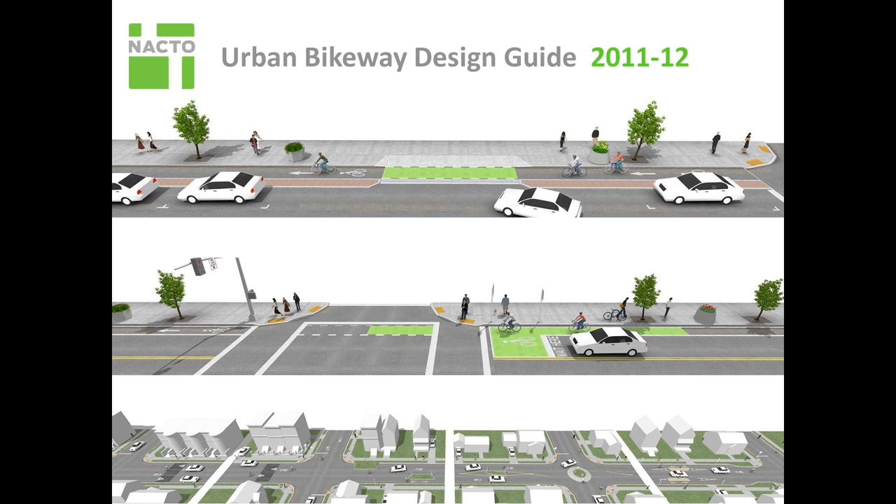Beginning with its Cities for Cycling project in 2009, NACTO really began its first foray into national design standards. The 2011 edition of the Bike Guide circumvented the stagnancy of other national guides, specifically the AASHTO Guide for the Development of Bicycle Facilities, which was extremely out of date and conservative, and had even restricted the majority of engineers from using world-class bicycle facilities like Copenhagen-style protected bike lanes or cycle tracks out of fear of liability and safety concerns

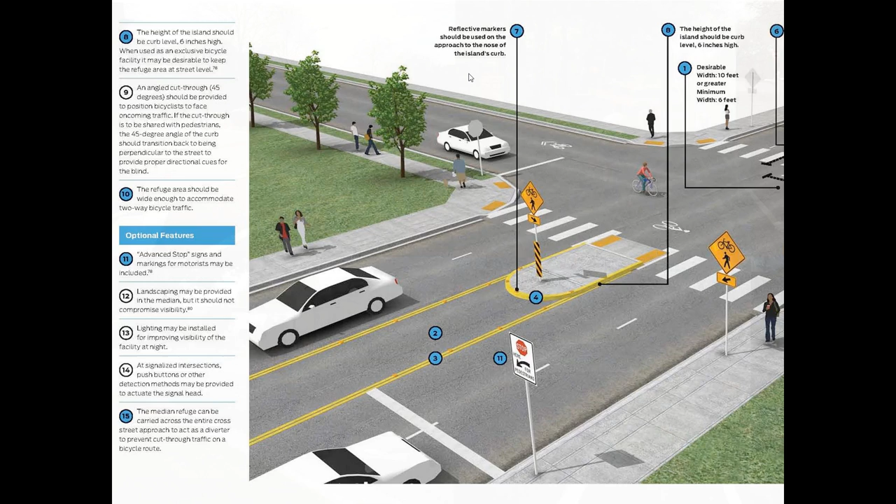but would gladly call a paved shoulder an appropriate bicycle facility. The Urban Bikeway Design Guide translated real-world game-changing projects like Market Street in San Francisco into a set of standard treatments that could be applied in cities across the country. In addition, the guide was one of the first to use a kind of dynamic and highly visual layout, and it has been highly accessible not only to engineers but to city leaders, to advocates, and to citizens who may not have seen these kinds of world-class designs on the street in other countries.

The Bike Guide very quickly set off a string of ambitious projects all around the country. Here we see Atlanta, Austin, Salt Lake City, Charlotte, all projects completed under 1 year after the Bike Guide came out, and it has really given cities a kind of permission slip to innovate. In October 2011, former U.S. DOT Secretary LaHood endorsed the guide and really signaled the way forward for transportation officials around the nation to embrace and implement it.

A significant number of cities have adopted or endorsed it since then and leading up to that endorsement. And in August 2013, we were thrilled to see the FHWA issue a memorandum officially endorsing the guide and distribute copies to each of their division offices around the country.

However, the bike guide was really just one aspect of a much larger set of issues concerning U.S. cities and their streets. The tools, the performance measures, and the day-to-day practices of most city street departments and transportation departments, from traffic signals to transit, really remained rooted in an interstate era approach to highway design, which was predicated on making streets wider, more forgiving to rush hour traffic, and consequently much less bike and pedestrian friendly.

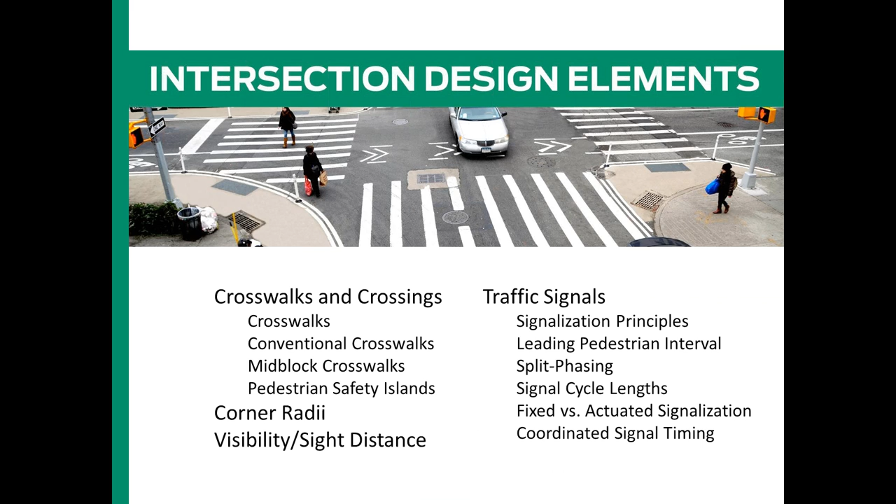Like the bike guide, the street design guide utilizes a really rich and dynamic visual layout, which not only gives cities the tools they need to design great streets, but presents the ideas and the vision, which is highly communicable to others who they're trying to get on board with these ideas.

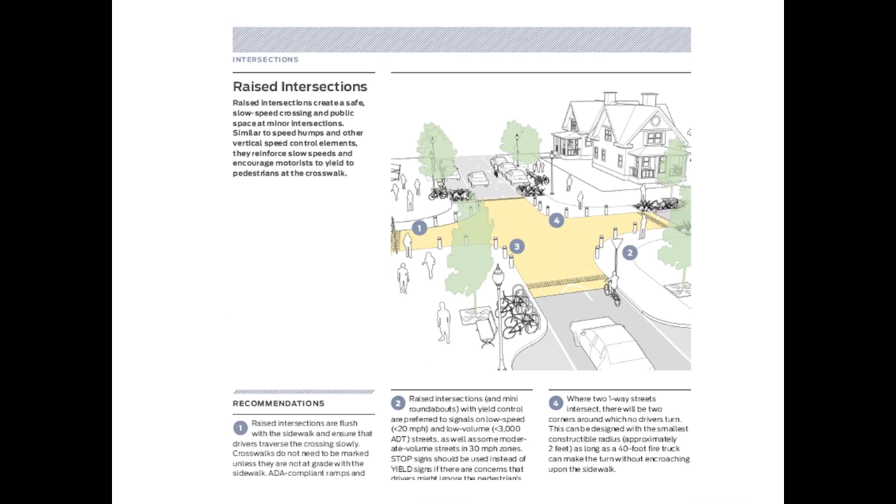The guide takes a significant number of lessons that are being pioneered in NACTO cities all around the country and makes what we call this secret sauce available to cities all around the nation so they don't have to reinvent the wheel.

In addition to the print guide, to keep it a really living document, we built an interactive website which is easy to use, with additional case studies, photographs, and materials that will be updated on an ongoing basis to reflect the state of the practice.

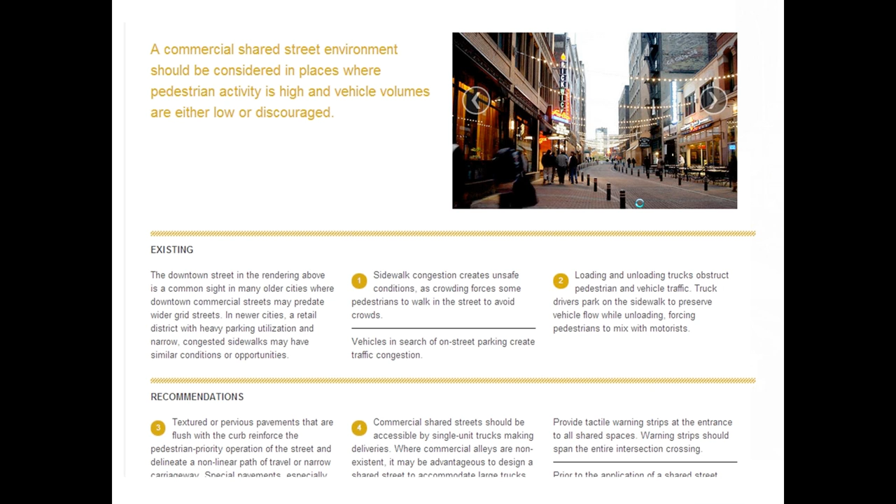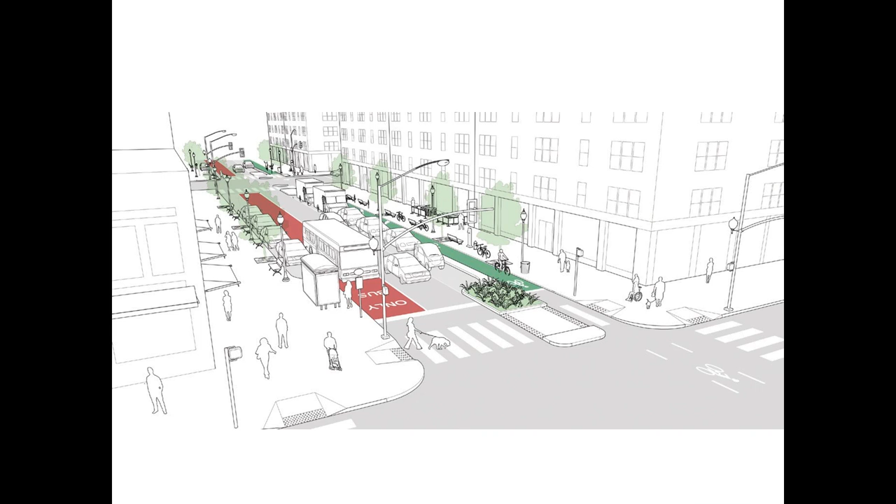Just like the bike guide translated exemplary protected bike lane projects happening in a variety of cities around the country, the street design guide takes projects that embody its main principles and translates these into guidance for cities around the country. The guide also engages some new concepts, including shared streets, creating new standards around those, and taking the best work from cities around the country and transforming it into world-class street design standards.

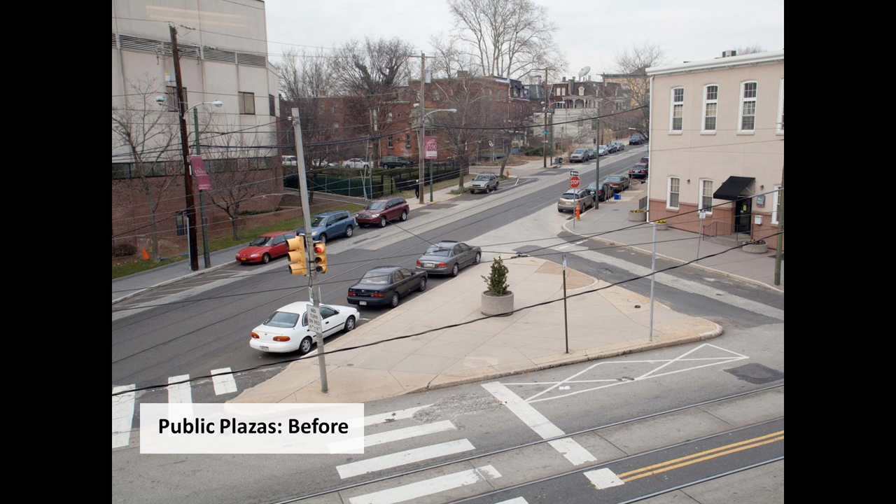At the center of the guide is a focus on how cities can begin to use tactical and low-cost solutions on city streets, like this new public plaza in Philadelphia, and then provide easily adaptable guidance for cities all around the country.

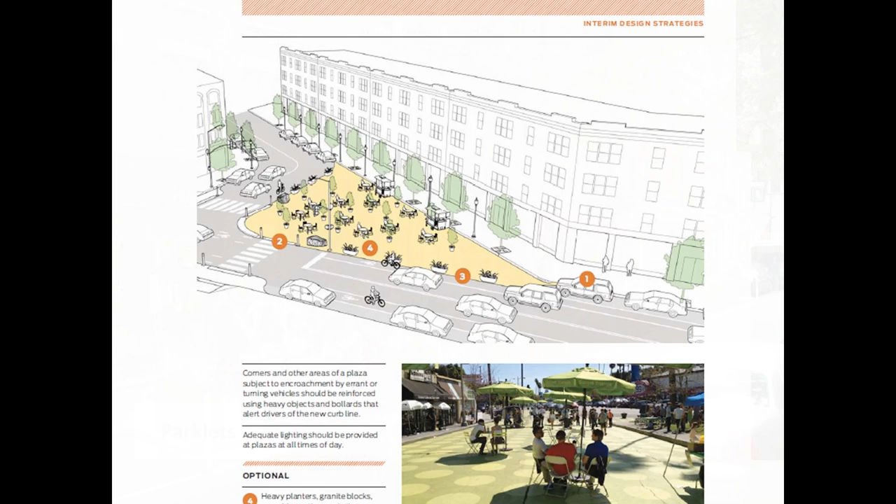Like the bike guide, the street design guide pushes the envelope by highlighting projects that have had an outstanding impact on the landscape of transportation, making these available to transportation officials from Phoenix to Wichita to Boston and San Francisco. Parklets are a great example and are now in over 10 cities around the country and growing.

Like the bike guide, again, the majority of topics in the guide have 3 levels of guidance: critical, recommended, and optional.

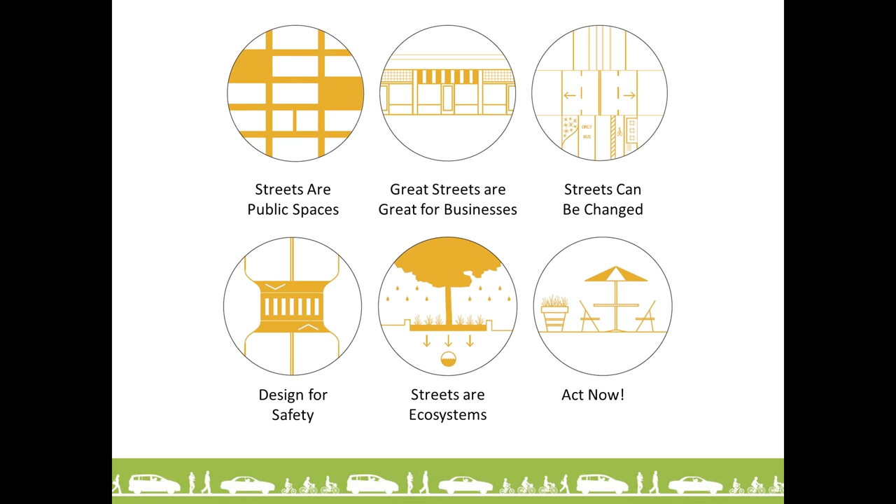The street design guide is governed by 6 overarching principles, which I want to lay out before turning it over to Mike Flynn. The first and foremost in my mind is that streets are public spaces and need to be analyzed, conceived, and designed as such. Streets should be judged as much for their capacity to attract foot traffic and be hospitable to those sitting and watching as for their ability to move cars, bikes, or buses where they need to go.

Great streets are great for business, and I want to call out this Measuring the Street report released by New York City DOT this year. Cities are really realizing that streets are as much of an economic asset as they are a functional part of a traffic system, and that a well-designed street has the potential to generate higher revenues for businesses and boost higher values for homeowners.

Streets can and should be changed. Transportation engineers and designers have the ability to work flexibly within the right-of-way, including moving curbs, changing alignments, daylighting corners, and reusing space in creative ways like installation of parklets, bike share stations, and traffic calming strategies.

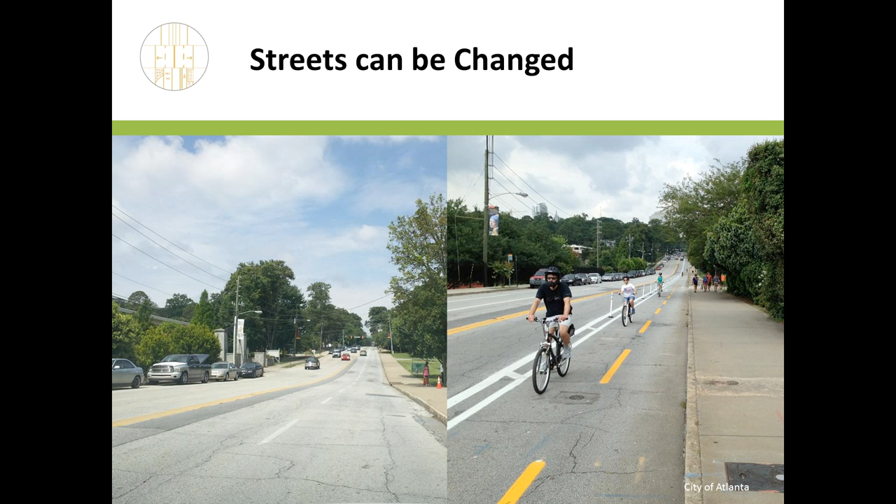Safety is a paramount and driving consideration for street design, especially in urban areas. Over 34,000 people were killed in traffic crashes in 2012, and each one of these deaths, and the hundreds of thousands injured, is avoidable. Traffic engineers and planners can work together to do much better, and we believe streets should be designed so that people walking, biking, parking, and taking transit can all cross paths safely.

Streets are ecosystems. The guide contains a wealth of information on items such as bioswales and pervious pavements.

And lastly, I think this is one of the most important points and the charge to everyone listening today: cities can act now. The materials you use don't all have to be capital materials, and not every project necessarily needs to be realized in a 5 to 10 year time frame, but there are things we can begin to do now that create public space, make streets safer, and enliven our cities.

The Street Design Guide shows streets that are in the process of becoming, in keeping with that Act Now and interim design strategy framework: this is the street existing or before, an interim application using striping and markings, and a full reconstruction.

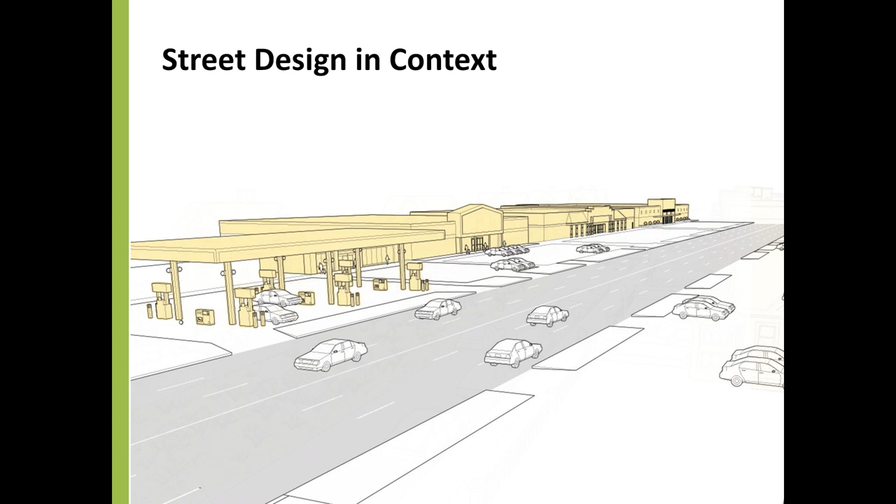Similarly, we emphasize the need to look at context, something explored in a variety of guides to date, thinking about how streets change as they move through different land uses, from a strip mall arterial to a leafy boulevard to a busy downtown with bikes, buses, people, and cars interacting.

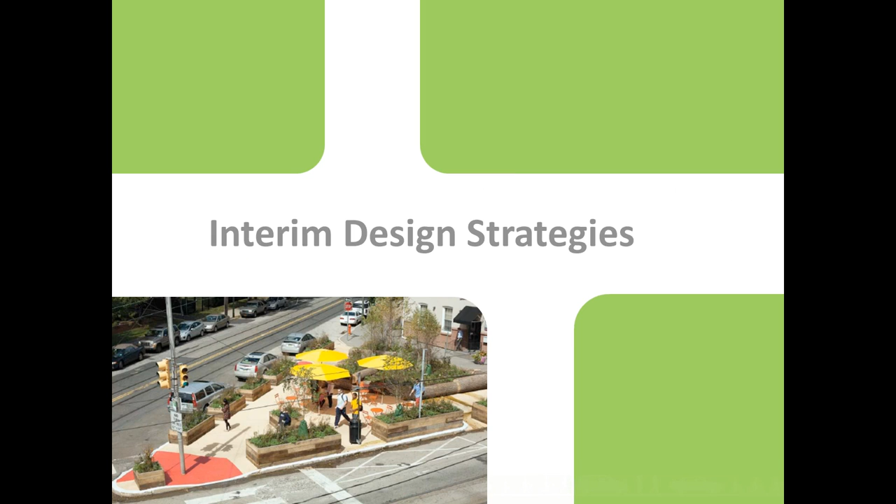Thanks, David. So I want to use this Act Now principle as a jumping off point. I think there are several things that make the guide unique, but this is something that's pretty revolutionary at the national level, but really in general, this idea of not letting the long term be the enemy of the short term, and really trying to get some results quickly.

Here are some of the typical challenges we face as professionals when we're doing long-term projects. Any one of these can throw a wrench into things, whether it be obtaining funding or justifying the need for funding for that project, building support from the public and also other key stakeholders like businesses, support from our elected officials, and the different kinds of approvals that we need to receive.

So in the past, we've really only had two approaches to getting our projects in the ground. We could use our immediate toolbox, our traffic control devices, our signs, signals, and markings, or we could do a really long-term project. And as we know, those long-term projects, a lot can set it back or even send it off the rails.

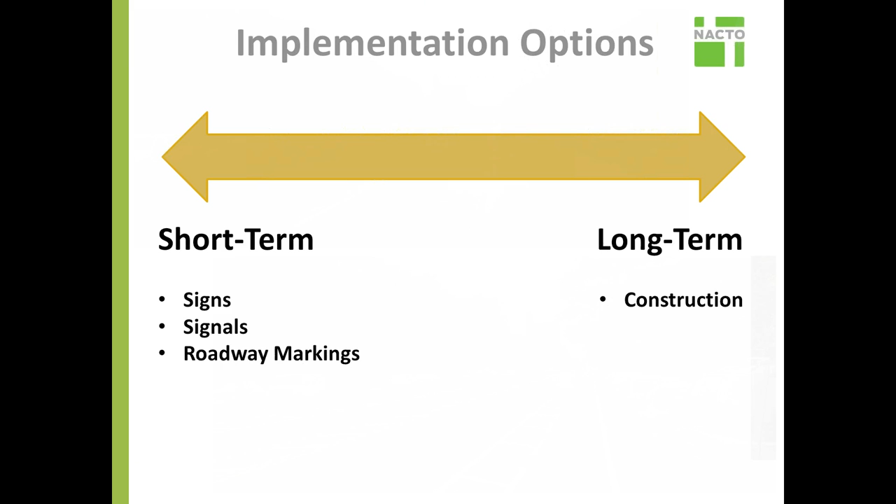I want to talk a little bit about our experience in New York and how we've tried to find a middle ground between these. So the signs, signals, and markings, there is a lot you can do with them. We're all very familiar, I'm sure, with road diets, with more innovative approaches to signalization, but it is pretty limited.

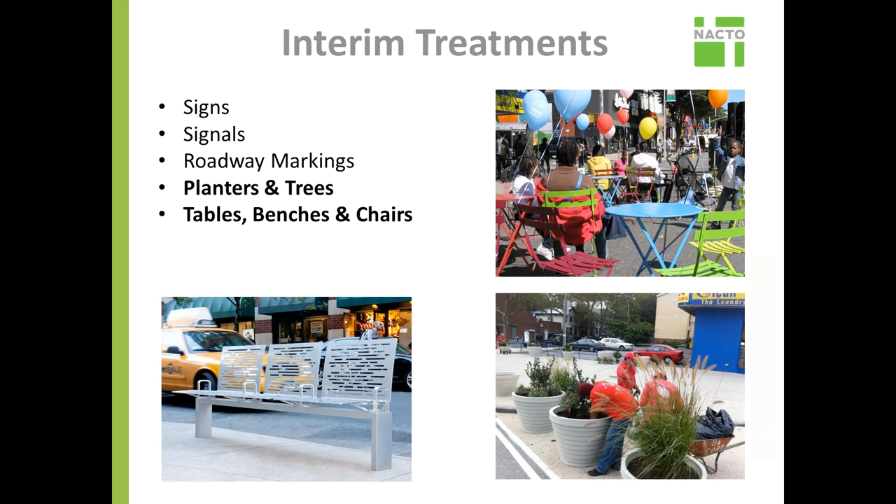We tried adding some new approaches to this toolbox and broadening it a bit. We started with things like planters, landscaping, furniture, both movable and fixed. Some of our earliest projects use this kind of expanded toolbox of interim design strategies.

Over time, we got a little bit more bold, and a little bit more sophisticated, and added things like colored pavement, both for dedicated lanes, but also for pedestrian space. That can include paint, but also epoxy gravel or truffle paint, as we call it. Use of stones, boulders as both seating, but also to provide protection from vehicles, and maybe even some limited construction work on the surface that won't trigger all kinds of utility impacts or drainage impacts.

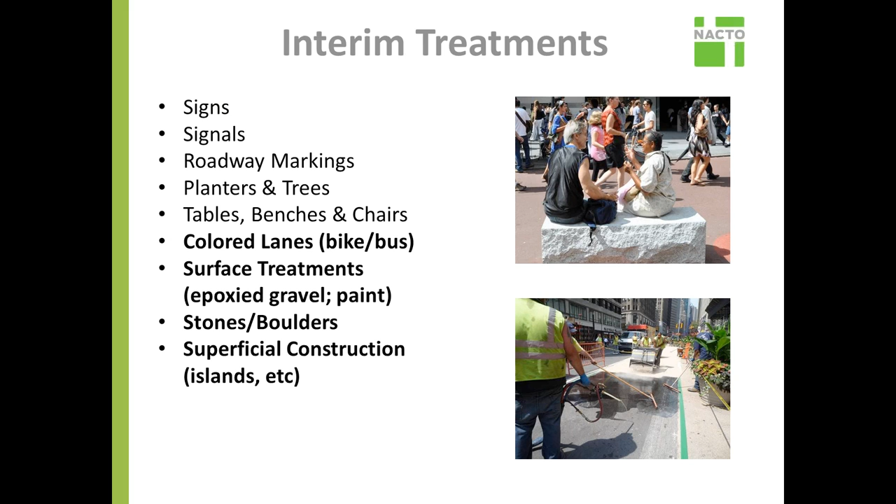This is an example of one of our earlier projects using that even more expanded toolbox. This is Madison Square, and you can see pretty much all those tools in use here.

But lest we get too caught up in the design side, we have to remember that there's a whole other flip side, which is the programming, the operations, and how we use the street beyond just what we put out there and how we redesign it. There's ways to get more out of your street in terms of just how you use it over the time of day or over the days of the year.

So if we think about this kind of expanded interim approach, it offers a few advantages. It's much quicker. We can do these types of things in months typically rather than years. We're talking tens of thousands of dollars instead of hundreds or even millions. There are fewer approvals involved. On the other hand, it offers a little bit less design flexibility because you're not dealing with grading, you're not dealing with utilities, and so it's a little bit more limited.

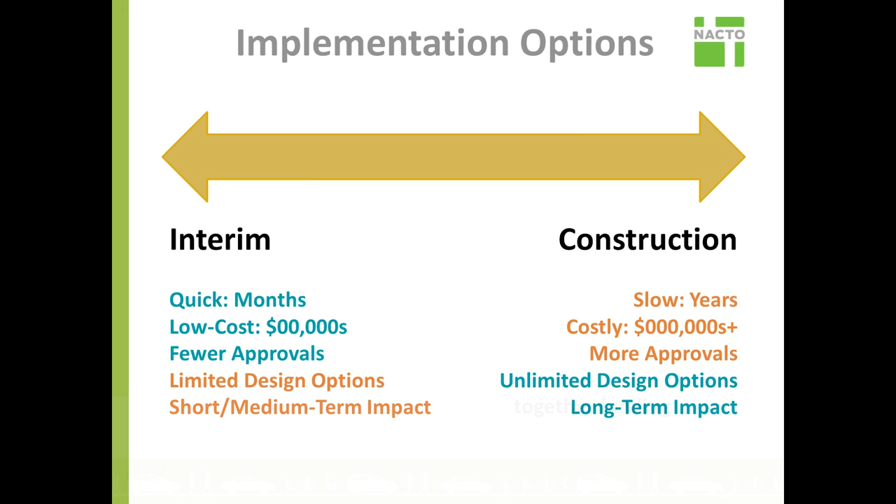And the impact in general is going to be a little more short term because it has a shorter useful life. You'll either have to keep maintaining it or at some point reconstruct it. On the other hand, that long-term approach of construction is slower, more costly, more approvals, although it does afford you more flexibility.

In summary, some of the benefits of this interim approach are that you can quickly reallocate space and show people that it works. Once people realize the benefits, you tend to grow your support from the public and from elected officials, and it allows you some time to gain funding for that higher cost, long-term build out.

I think this is taken from the guide. The guide endorses this sort of phased, two-phased approach. Instead of just looking at this one long-term project, why don't we get something in the ground, demonstrate that it works, build support, while we keep working in parallel towards long-term build-out. This is basically the approach we're taking in New York, and we've found that it works great, and it delivers many benefits.

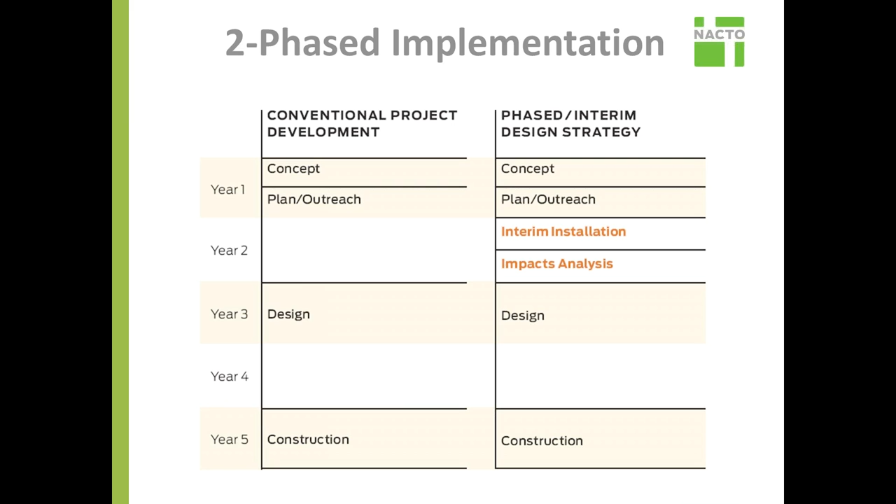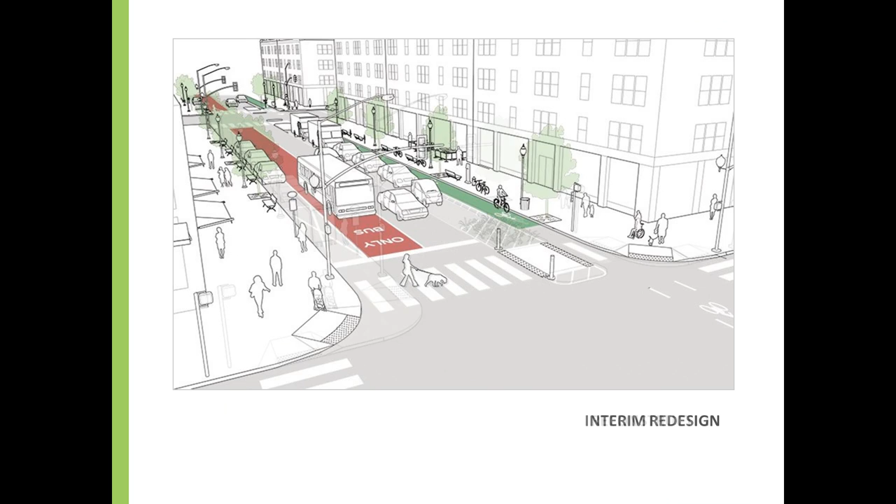I'm repeating some slides from David, but I want to reinforce that the guide illustrates this in a really helpful way, and it's something you'll probably want to use in your own projects with those you need to win over. This idea of what's there now, what could we do relatively quickly, and what would a long-term vision be that we can work towards.

I'm going to jump into some of the specifics in the guide's interim design strategies chapter. Basically, it divides into 4 categories: moving the curb, parklets, temporary street closures, and interim public plazas. Each of these, or some of them, have some subcategories too.

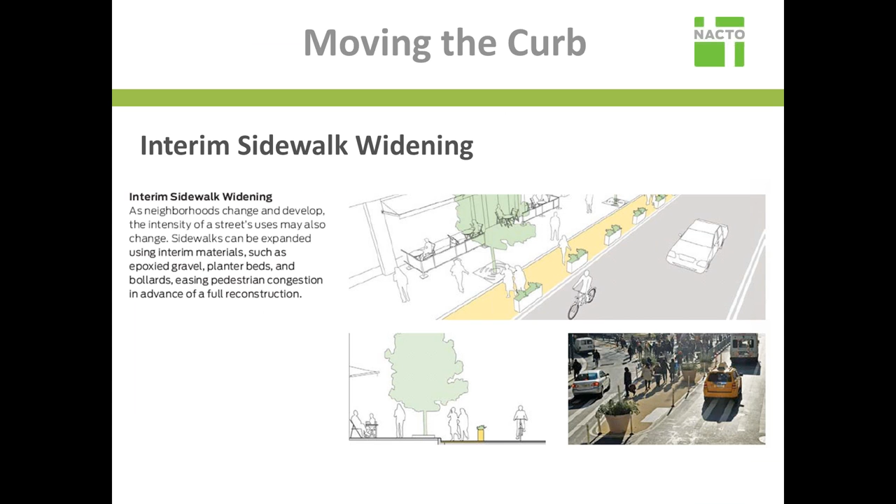With moving the curb, one of the big ones is interim sidewalk widening. It can be really complex to move a curb line permanently because of drainage, utilities, catch basins, things like that. In many cases, we don't need to wait to do that permanently. There are things we can do in the meantime that will give more pedestrian space and traffic calm, and the guide definitely encourages this.

A couple of examples from New York. The one on the right is Union Square, more recent, where we really started to get creative with different types of separation, assigning different types of lanes for bicyclists and pedestrians, planters. You can even see a statue of Andy Warhol there. On the left is an earlier approach, maybe a little more rudimentary, where we just used flexible plastic bollards and some planters, but it got the same effect. That was at a busy transit hub in the Bronx, where at rush hour you really had a lot of sidewalk crowding.

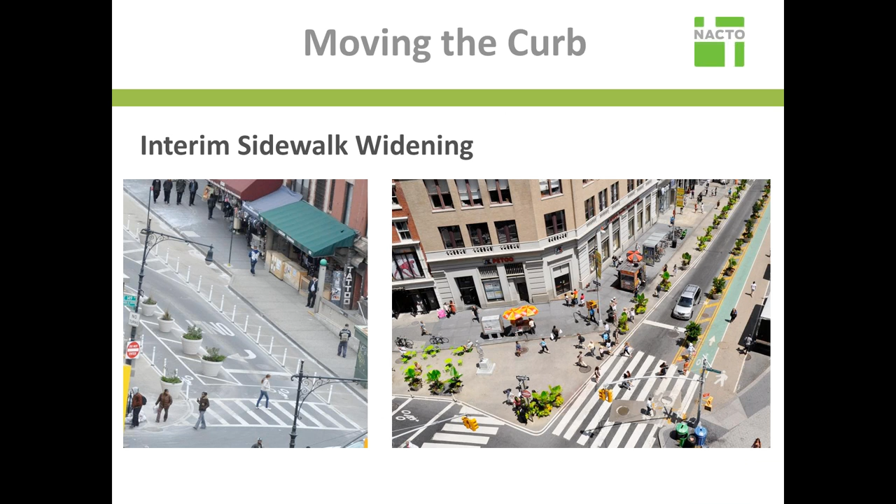Next up is traffic calming. Basically, anywhere at a mid-block, in particular, where you'd want to narrow the road down, maybe to provide a crossing, or just to physically and visually narrow it to slow speeds. A lot of places around the country have already done this, where you basically keep that channel along the curb for the drainage, and you don't have to worry about all the complexity involved in building that out. That's a real quick way to do traffic calming.

A way we've adapted it in New York is our 6.5 Avenue project, which connected a whole bunch of public arcades and plazas in Midtown Manhattan between 6th and 7th Avenues with new mid-block crossings. We used truffle paint, flexible bollards, and some of our standard benches to not only create a safer mid-block crossing, but also create a little mini public space.

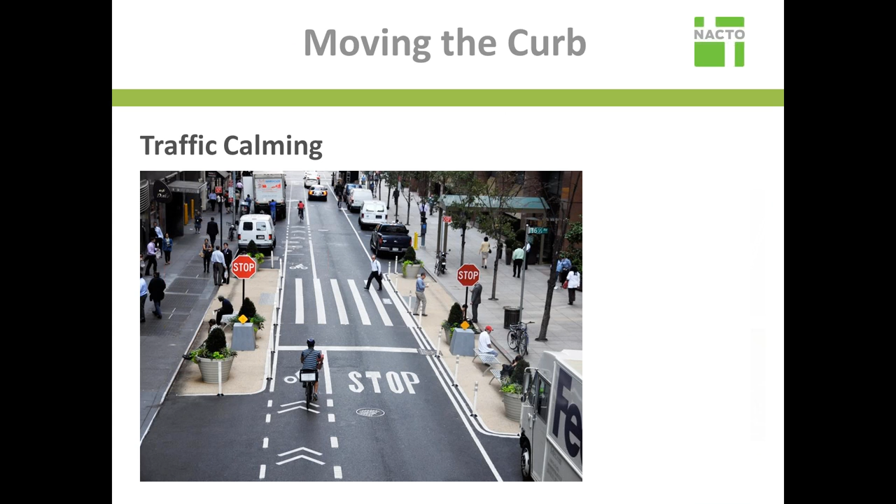Bike corrals are also something that's been around a while. We've seen a lot of cities around the country be out in front on these. We're a little more recent to the game in New York, but we're now pursuing it pretty aggressively, where you take one or more parking spots and provide bike parking. Generally, these types of programs are application-based or really dependent on businesses coming to you. You want that kind of buy-in, and I'll talk a little more about that later—the general need for buy-in and community partners to make a lot of these strategies successful.

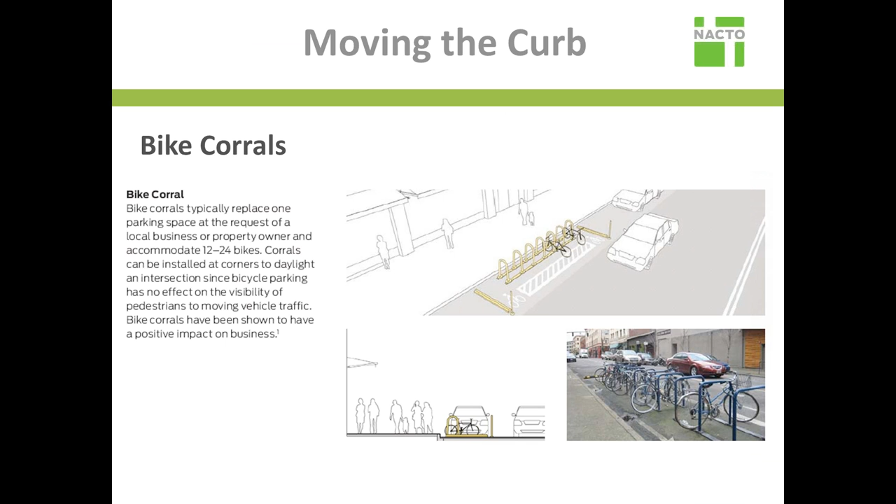A couple of examples. I don't think I need to say much about bike share, but similar to bike corrals, this is another way of reimagining the parking lane, providing a really useful service without having to impinge on the sidewalk space, especially in areas where you have limited sidewalk space.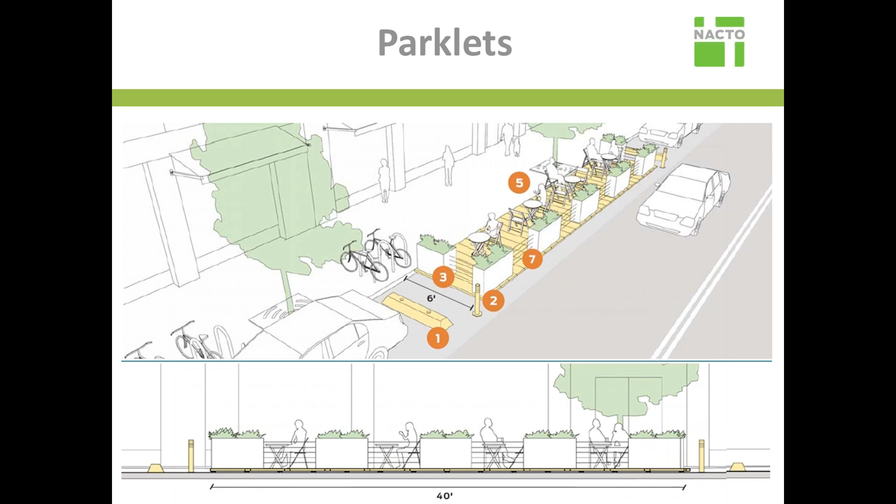In New York, it's an application-driven program. Businesses apply, hopefully more than one at a time. They can kind of group together. We want to see that support, and we want to see them do a little bit of homework before they approach us. That ensures us that this is really going to be a winning location.

Temporary street closures. We know sort of street fairs and festivals, but cities are getting a lot more creative about how we do this, how you program it, how you locate it. A big difference is working a lot more closely with the communities, with the businesses, with the community organizations on how you program these so that it's really pertinent to the people who live there, so that the locally based businesses are really represented. This is a way to let communities reimagine their streets and realize there's more you can do with it before you kind of come in and do a longer term project. It's just a way of changing people's perception of their streets and realize they have a sense of ownership.

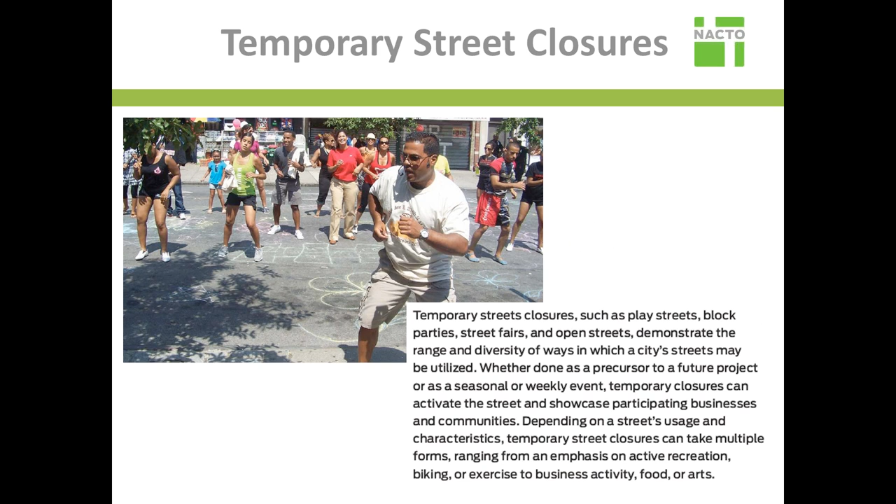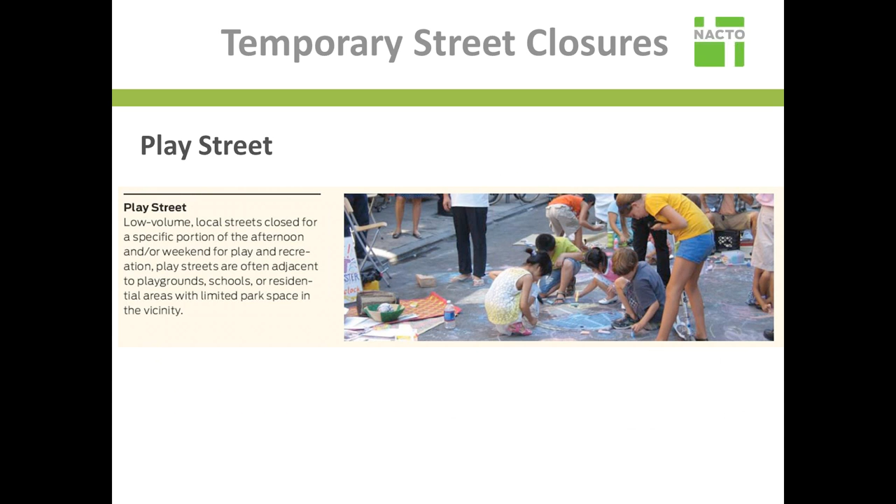Play streets are similar, but are really tailored to places where you expect children, particularly schools, but also adjacent to playgrounds or areas where you think there'll be a lot of that kind of activity. In New York, we partner with our Police Athletic League. We've been doing this for years, where they really take the lead on working with the schools and the communities to implement these, to put out the barricades during the hours that it's closed to vehicle traffic, and even to program it.

Then you have your pedestrian streets where it's closed on a weekend, or... actually ciclovia is a different category, sorry, I'm going to jump ahead. I think an important consideration for pedestrian streets is that it has that local flavor and that it should be customized. You can see here a few examples in the upper right. This is Bastille Day in a neighborhood in Brooklyn that has a real French character, where they actually put sand in the street and do petanque, which is sort of like bocce, I hope I pronounced that right, which is a typical French activity.

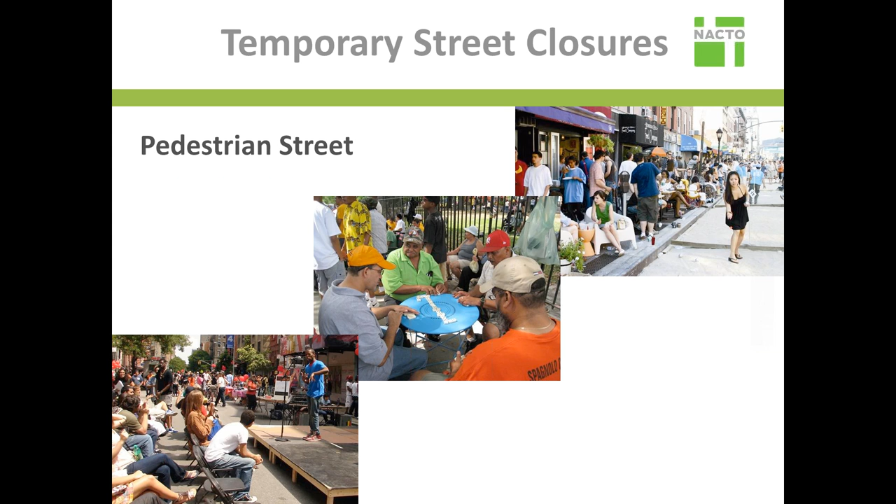Markets are kind of self-explanatory, where you have either food markets or other kinds of markets. You can leverage that and have that synergy where it activates the street and may give you the impetus to do a larger pedestrianization of the street, temporary or full-time.

And finally, open streets, which are sort of a larger version of the weekend street closures. I guess a lot of us know the ciclovia in Bogota and ciclavia in LA, and many other cities are now rolling this out. Here in New York, we call it Summer Streets, and it runs up the center of Manhattan from the Brooklyn Bridge to Central Park, almost 7 miles. Heavily programmed, all different kinds of activities, from zip lines and physical activities, exercise, to performances, interactive, like this dance class.

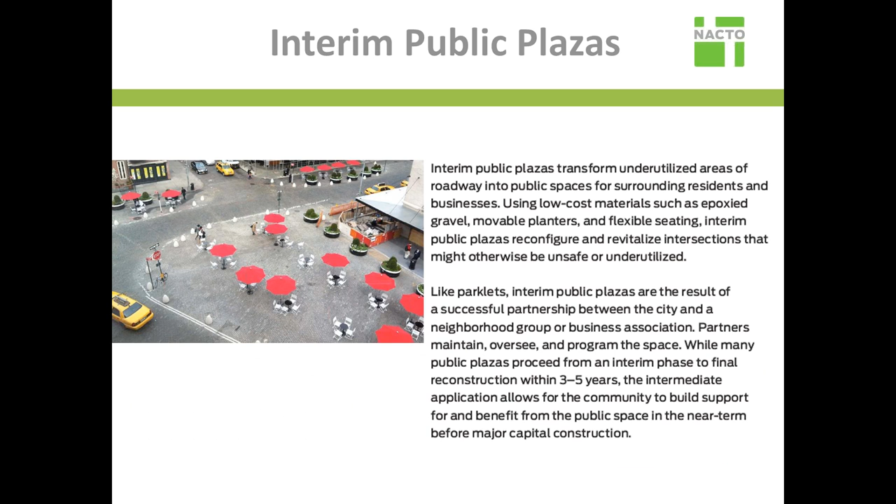Last but not least, interim public plazas, which basically are a way of creating public space quickly in advance of a longer term project, and leverage the interest and activity you may already have in that community. The guide gives really detailed design guidance on siting it, on specific design, separation, furniture, pavement markings. It's really pretty comprehensive.

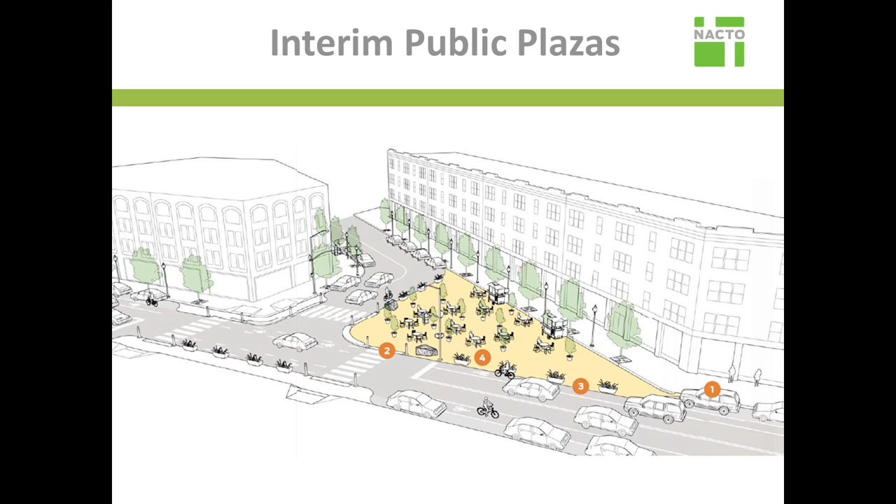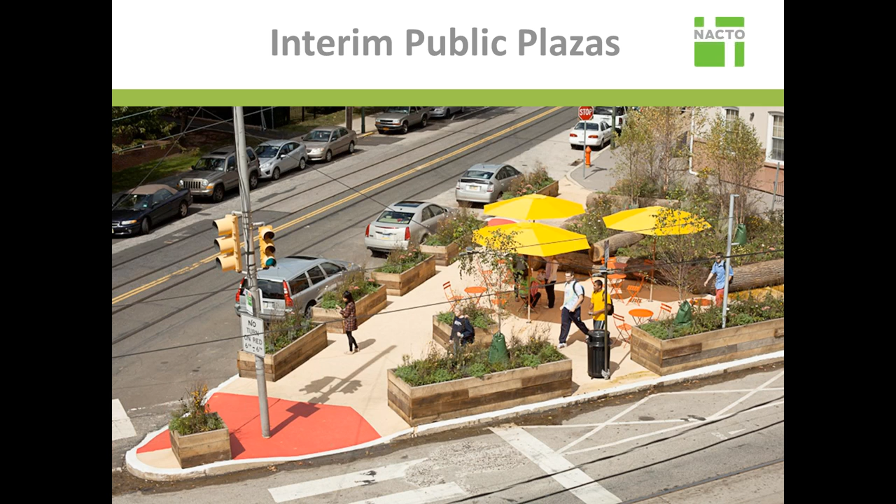I'll talk a little bit about the New York City Plaza program because I think it can provide some instructive information on the soup to nuts of how other places might pursue temporary plazas with an eye towards permanent plazas.

Our plaza program is an application-based program. That's good because it shows that you have some level of support already, and it also shows that you have a pretty strong maintenance partner.

We prioritize areas that are high need because they lack open space, basically on a per capita basis, and also because they tend to be lower income. Those would be the areas that we target.

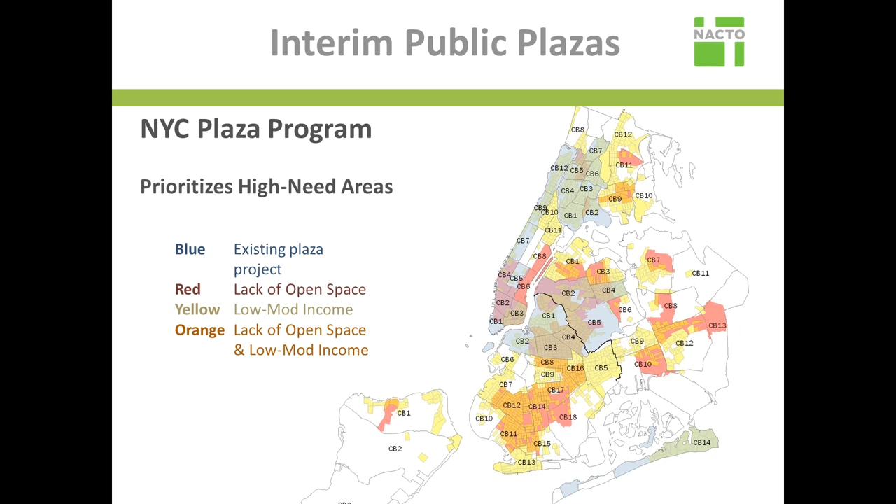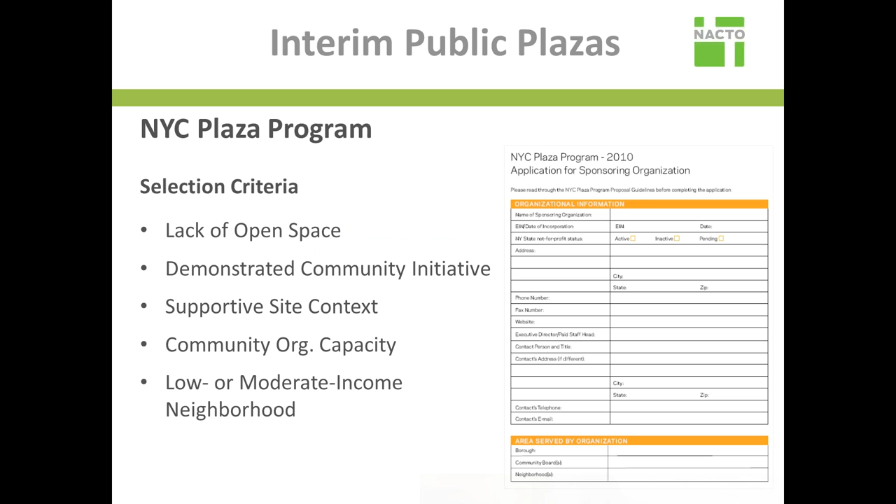We make sure that we do pretty thorough public outreach. We do it in the form of interactive charrettes where we really let people use their imagination in terms of what they'd like to see design-wise, but also event-wise, programming-wise. That also helps maximize the buy-in.

In terms of how we split responsibilities, the city basically agrees to fund the construction, to do the design and the engineering work, kind of all that technical heavy lifting. What we ask of the maintenance partner is that they do the outreach, they provide input into the design, and they do almost all of the maintenance, essentially.

There's some requirements in terms of indemnification, and they're the ones who are in the lead in terms of programming and events and the long-term operation and maintenance funding.

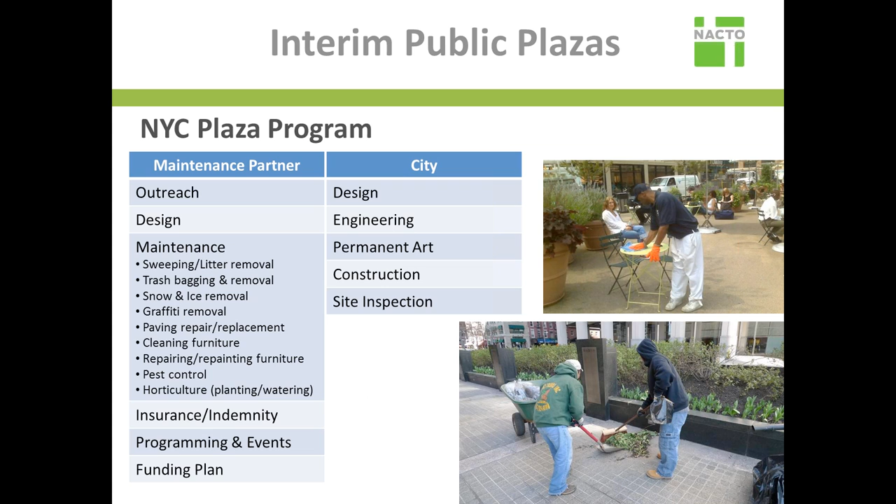How do they pay for that? They have a few pretty big options at their disposal. They're allowed to do certain kinds of sub-concessions like food kiosks or other kinds of kiosks. They can do limited sponsorships. That could be private, like corporate sponsorships, but also individual or charitable sponsorships. And they can also do sponsored events.

But all that money is required to go into the maintenance of the site. So it guarantees that whatever money is raised there goes back into that site.

So I think that point bears repeating, and I'll end on this note: it's more than just what you design, and the guide speaks to this. It's really also about how you activate the space, how you make sure it's a destination, as close to year-round as it can be, as close to basically 24/7, 365 as it can be. And that's going to help build the support you need to see it through to a long-term project. It'll best ensure that it's a successful space.

We're now going to hear from Michael King, welcome Michael. We want to make sure Michael King is unmuted because we're not hearing him. Michael, you are on the air. Oh, now you have unmuted me? Yes, you are unmuted, can you see my screen? And we can see your screen. You are okay, good to go.

Good, thank you. I first want to say thanks for that plug in the beginning, Kit. But any successful project has a really good client, so I want to extend all the credit to David Vega-Barachowitz and Linda Bailey. And if there's any confusion, my name is project manager on this thing, but it's David's baby, he really wrote the scope, so all credit goes to him.

So what I want to do is talk about 3 items: intersection design principles, some traffic signal principles, and a bit about crossing the street.

Let's see if I can make my screen move. The best way to do that is in the lower part of your screen, you'll see some arrows, you can just touch the button to go forward, it's the lower left side. Oh look at that, okay.

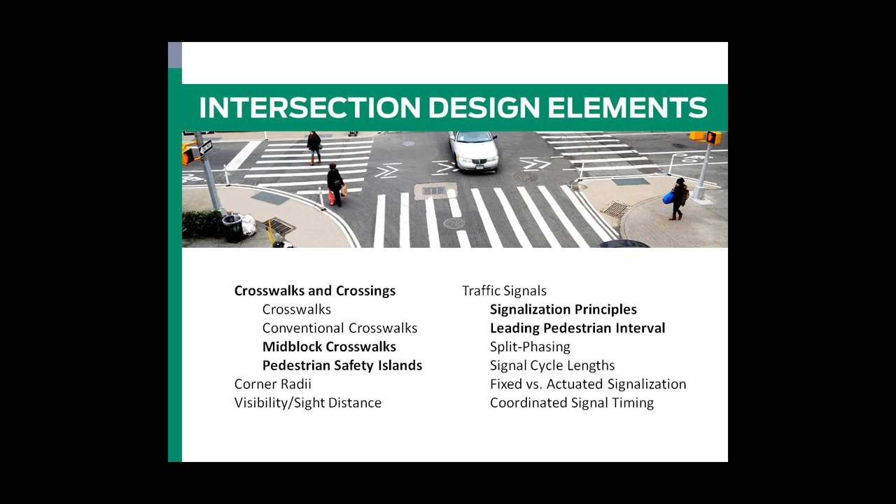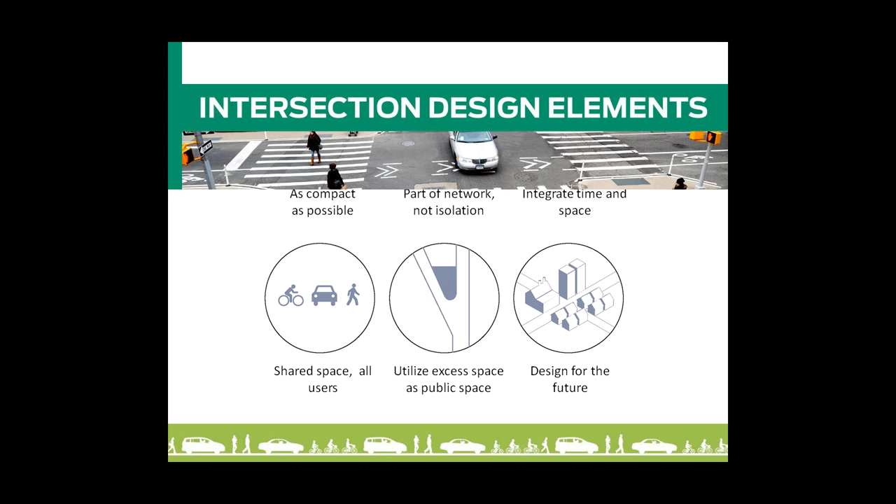So the intersection chapter, these are the subheadings of this. I'm going to talk about the principles, and then in the intersection design chapter I'll talk about these items. I think there's about 6 chapters in the book. So intersections, let's get to—I think David talked about 6 sort of overriding principles, and here are 6 intersection principles that we coalesced around.

The first one is probably the most important: intersections of streets should be as compact as possible. This doesn't mean small, it means they need to be sort of one lane—every entry lane should have a receiving lane kind of thing. It shouldn't have a lot of excess space for drivers to have to make decisions. You should make it tight and efficient. This helps in channeling traffic, but also helps in crossing the street, minimizes conflicts, and speeds up traffic signals.

The second one is that intersections do not exist in isolation, and they should not be analyzed in isolation—they're part of networks. So talk about overall travel speed, not a particular level of service, for example.

Integrating time and space is about—there's a design and there's operation. Intersections are, you rob Peter, you got to pay Paul, and we need to be very cognizant of that. They are shared spaces, not sort of for one mode in particular. Whenever you have excess space, especially at triangles, Ys, X's, things like that, try to convert as much of that to public space. And think about the future, always think about the future. That means the future might be more cars, or maybe the future is going to be less cars.

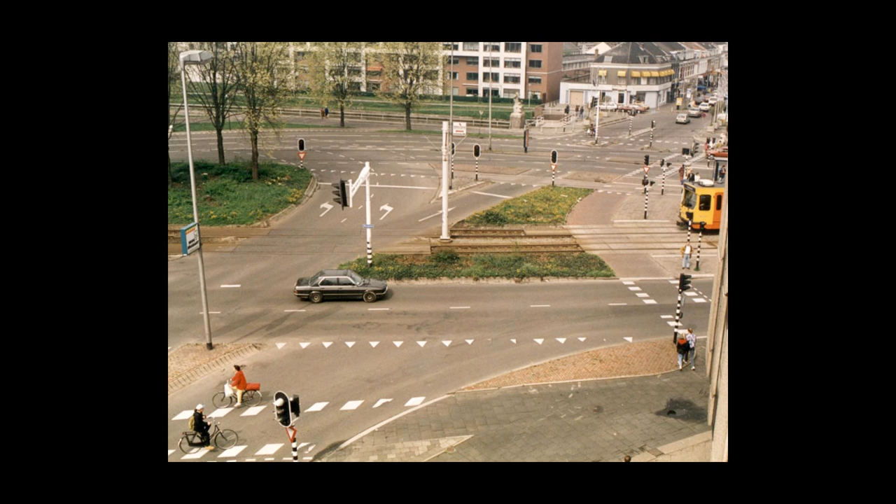These are the sorts of things where when you walk your kid home from school, you have to sprint to cross the street. Here's another example of an overly large intersection with a right turn lane. A lot of what I do is just draw lines, fill in the gaps, and suddenly you can see that this island could be 1, 2, 3, 4, 5, 6, 7 crosswalk bars bigger, and would affect nothing.

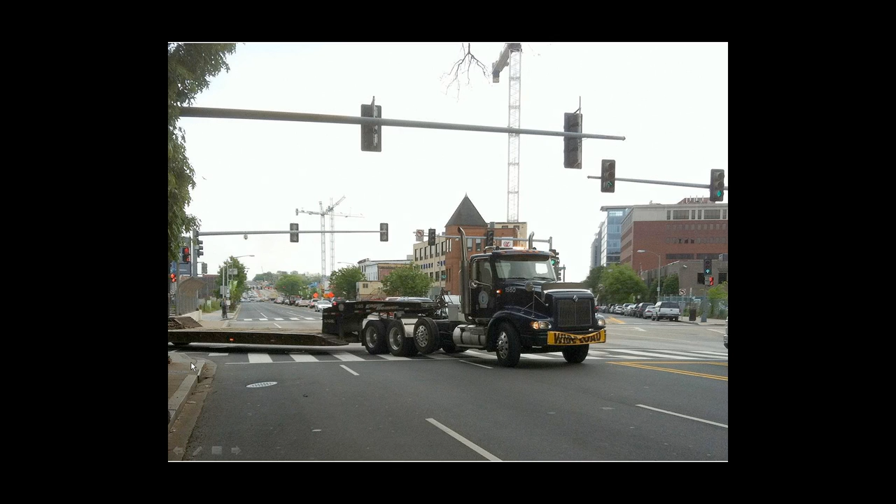Here's an example from Portland where we can see how, just by moving things out a bit, moving the stop line out, you can make the intersection more compact. Courtesy of Michael Ronkin, this photograph is from Washington, D.C., at North Capitol and New York Avenue I believe. You can see there's a pretty large truck, a highway expressway kind of truck with a wide load, no load on it actually, but it's making a pretty wide turn using the whole entire street.

So the curb on the lower left-hand corner is still pretty tight. We can have a good tight curb and still allow big trucks to turn around because they have a signal, so they can use the whole entire street.

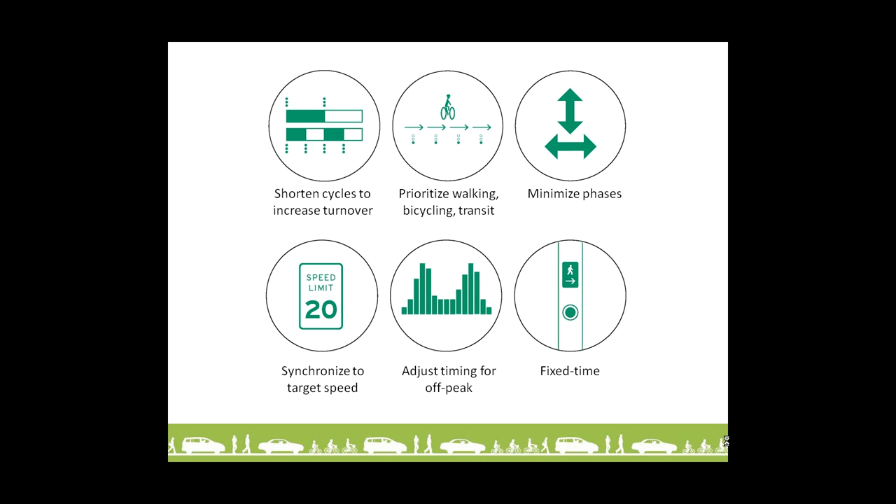Second thing, traffic signal principles. I know I'm probably running behind time, so I'll just run through these. Shorter cycles mean less delay, the whole thing about rob Peter to pay Paul. Signals are a good place to do mode prioritization. Fewer phases is better than more phases, so anytime you can simplify intersections, that's going to be better for delay.

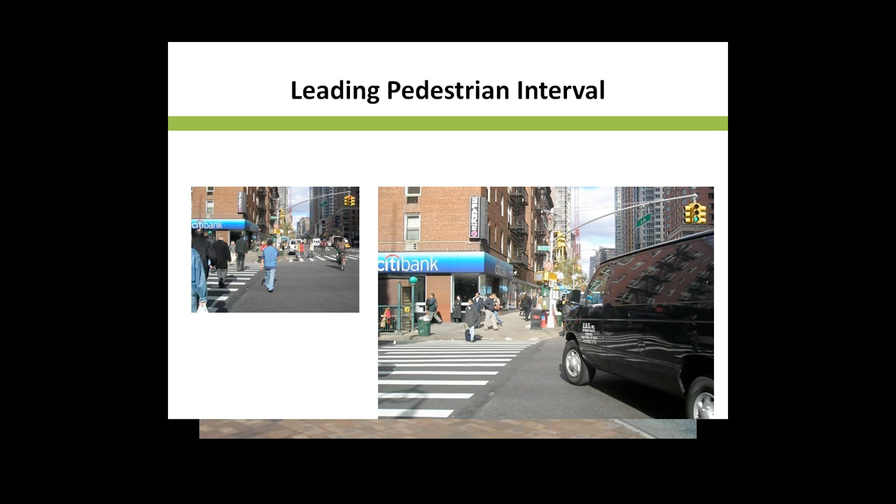Synchronize the target speeds, something we should do a little bit more of. The difference between on and off peak, or rush hour and off peak timing, is really critical, because sometimes you time your signals for rush hour and that gives you really long green times for off peak. Unnecessary, and it just leads to speeding and people waiting forever to cross the street. We like fixed time signals in cities, we don't like buttons. Let's see if I can get this thing to move again.

This is the green wave in Portland. And one of my favorites, the leading pedestrian interval, at 6th Avenue and 23rd Street in Manhattan. Here it is in action, where we see the woman with the stroller on the left-hand side, and two or three people on the right-hand side. You can notice they get the walk light before the green light comes on. Here's the green light, and they're pretty much across the street before the cars even start to turn. So that's how LPI works. The driver still didn't yield at the end, but at least the kids got across the street.

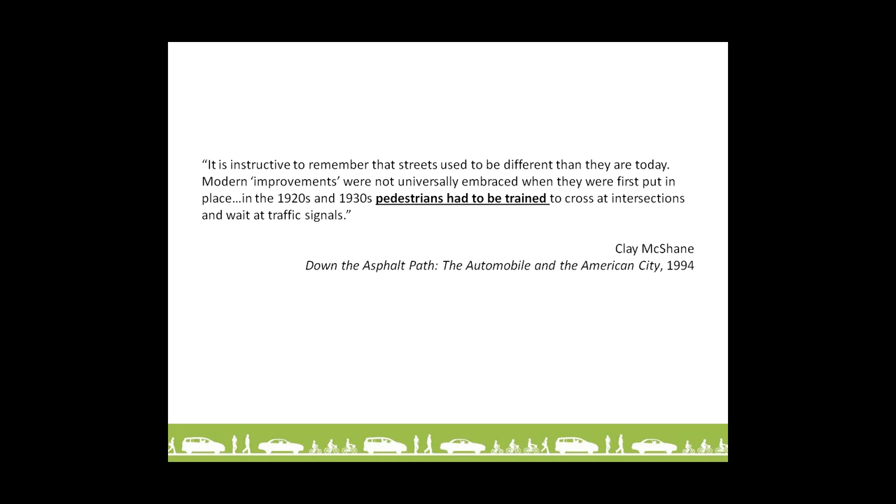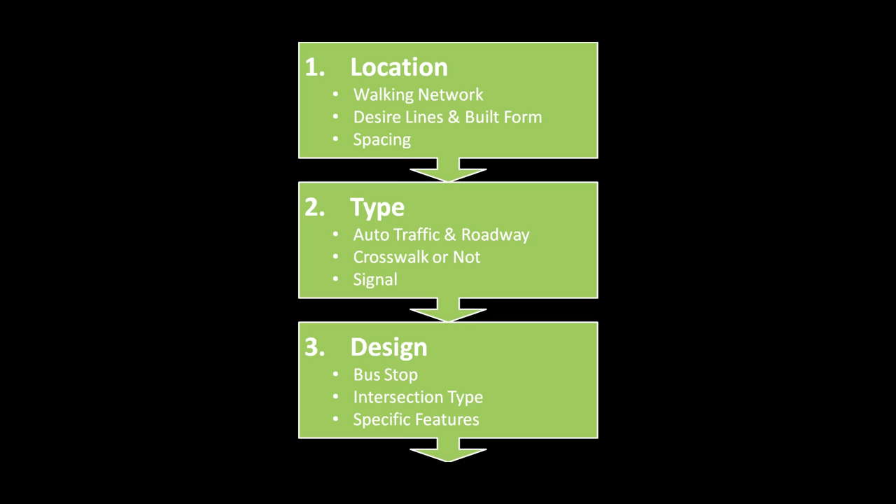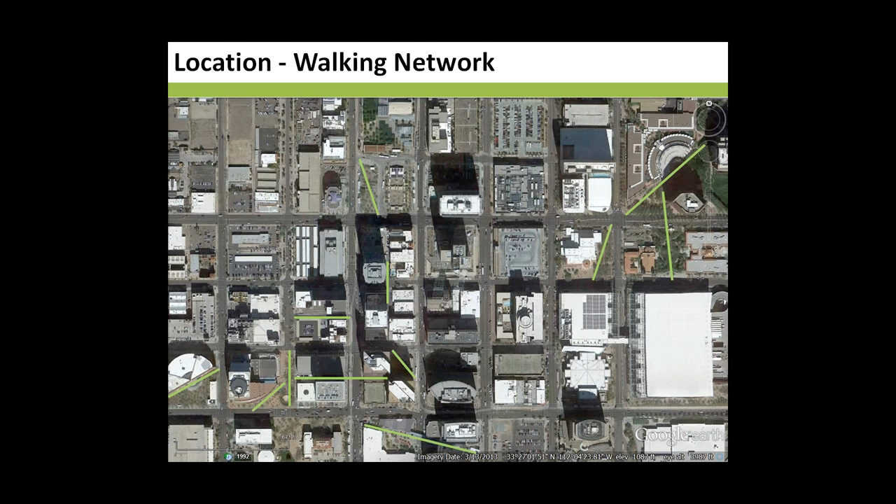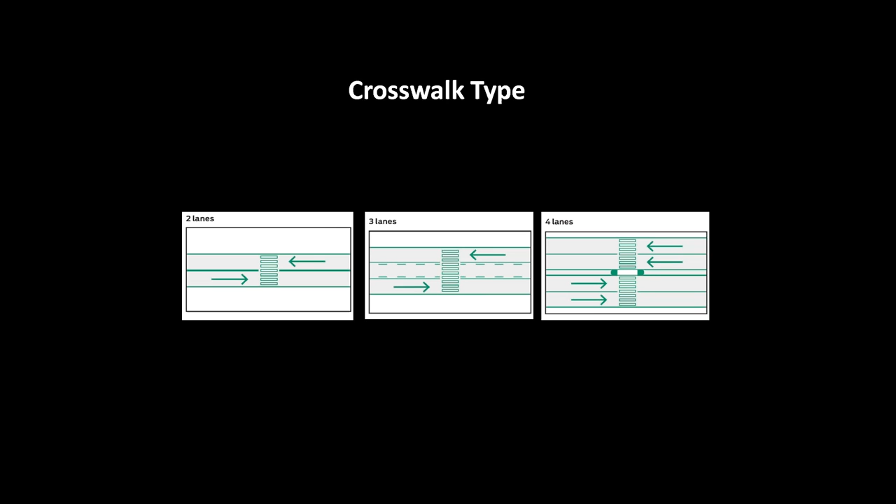In the guide, these are three excerpts from the guides about different types of crossing facilities based on the roadway type, travel speed, and things like that.

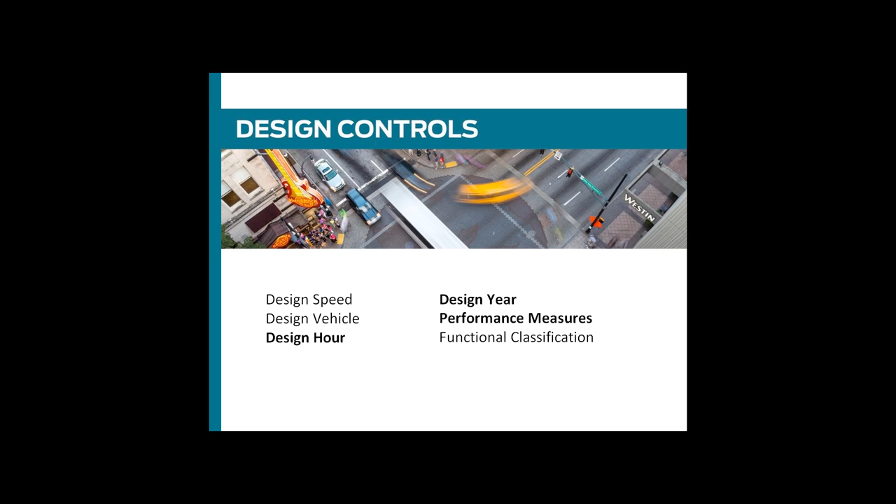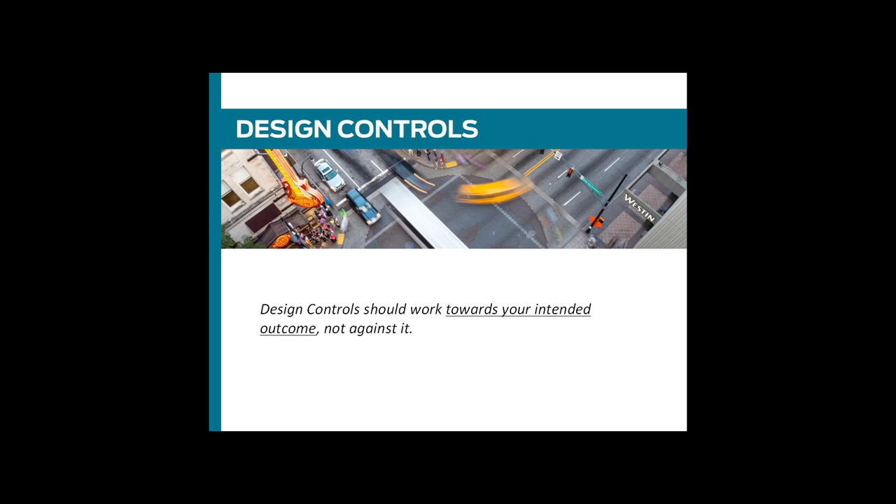Okay, thanks, Kit. Last but not least, I'll take on design controls. Design controls are the assumptions that result in the implementation of transportation solutions, I like to say, and they're fundamental elements such as travel speed, the types and sizes of vehicles and their characteristics, the time period they will be studied. They're all covered in the design guide, and I'll just highlight some of the assumptions that we've used in Portland and that are covered in the guide.

The first part, I'll describe a bit about what the traditional procedures have been, and then how NACTO distinguishes what we expect in the urban environment. It's important to note that high-quality design really relies on this understanding of analytical processes, and the assumptions really do matter. Design controls should work towards your intended outcome, not against it.

So thinking about the manual and how it's organized, the design assumptions are in the back, because you really shouldn't have your assumptions up front. You should think about what you expect out of the street before you drive through the numbers essentially to get what you're trying to achieve. So really beginning with the end in mind is part and parcel to this discussion here with the assumptions.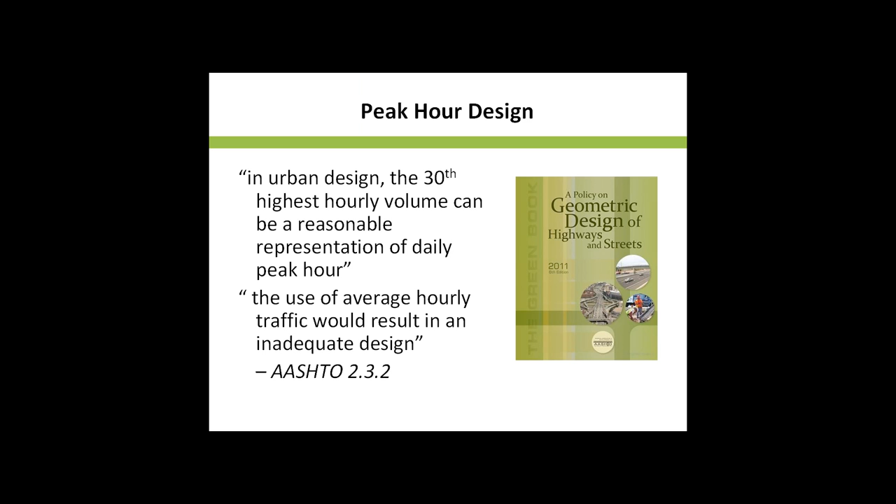I'll start out with design hour as I go through the guide, because that's really important as the basis for design. Our common practice is to study the peak 15 minutes of traffic using the Highway Capacity Manual. That's what we do in the city of Portland to assess whether a development has adequate transportation for moving cars. We study the 2-hour peak, but then narrow down to that 15-minute period, and that leads to facilities of this nature that maybe are bigger, maybe aren't as urbane as they should be.

So to that extent, we want to try to change that paradigm. The AASHTO Green Book is part of that as well, as it focuses on the 30th highest hourly volume. And if you think about the 30th highest hour of the year, that really is accounting for only less than one-third percent of the time on the street throughout the year. So if you're thinking about trying to create a space in the city, you really shouldn't be designing for that 0.34% of the year.

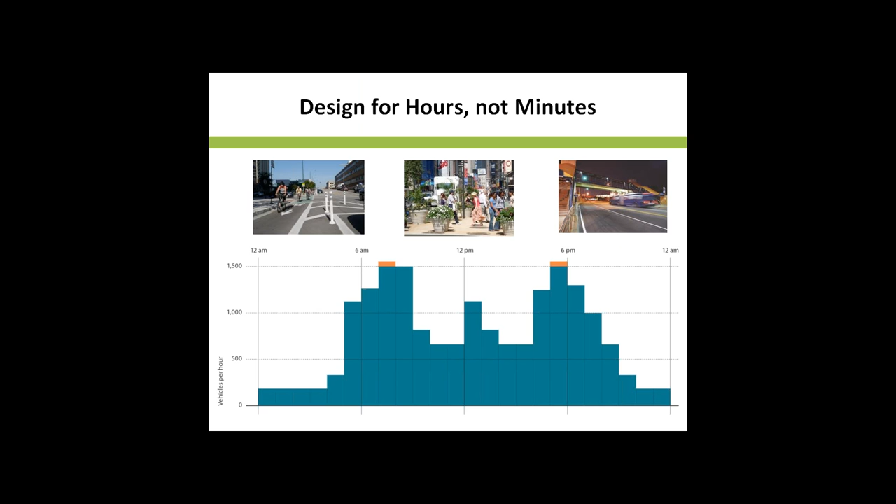So the Urban Street Design Guide focuses on thinking broadly about the day, thinking about peak spreading. Of course, in the big city, we have congestion, and it does happen through those peaks. So maybe you don't study the peak 15-minute. Maybe you look at the peak hour or even 2 hours of time and think about how the analysis of the second hour works as opposed to just that peak 15-minute period.

The NACTO guide introduces some really nice concepts in terms of thinking about all hours of the day. And Michael talked a little bit about thinking about signal timing settings for 8 p.m., thinking about what you need during the lunch hour.

So those needs are different, and the day in the life of the street described in the manual highlights the need to do specific things with traffic signals and on-street parking regulation, and even transit and HOV lanes, to think about how we foster multimodal transportation beneficial to cities. Streets need to be designed for peak intervals of traffic, but that may also lead to failure in creating a safe and attractive environment throughout the other portions of the day. So it's a trade-off of when you need a mobility function, when you might highlight and improve accessibility of the street, and also focus on neighborhood emphasis where needed, thinking broadly about all hours of the day as opposed to those peak 15 minutes.

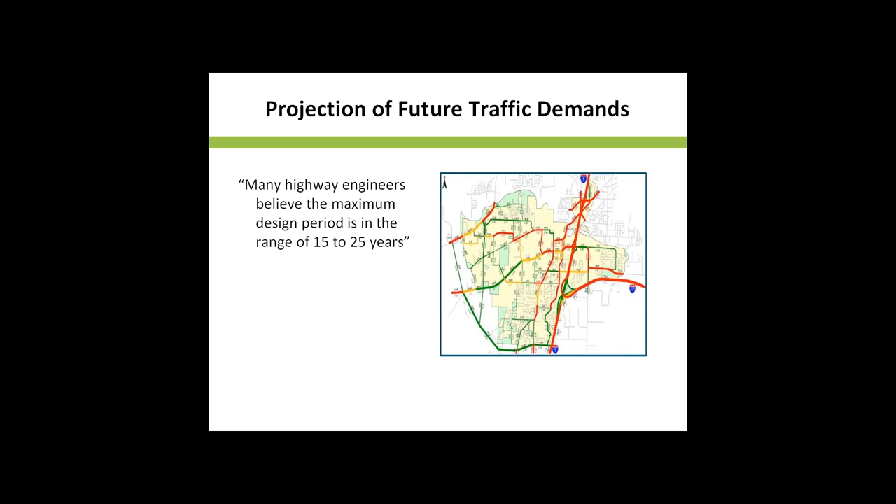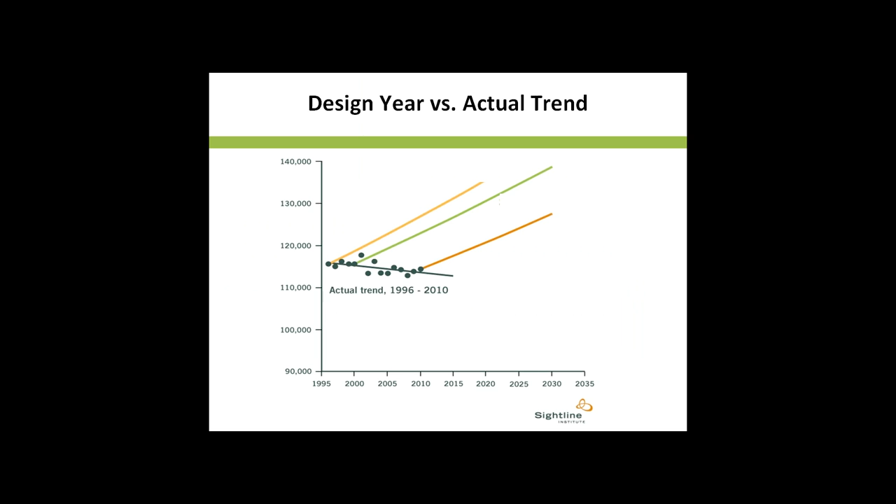I'll transition into design year, because part of the look and analysis of streets is really what we're doing today, but then also what is coming down the line. We talked about this earlier related to how transportation modeling efforts may hold us back from creating the sort of streets we want. It's often difficult to project land use in the future, but we have to do our level best to think about what traffic needs will be and whether we want those needs met within the districts we're working in.

From the AASHTO perspective, the AASHTO Green Book talks about highway engineers asking for a maximum design period in the range of 15 to 25 years. Oftentimes what that looks like in practice is a straight line projection. This is a slide I borrowed from the Sightline Institute, where they looked at a project with three different projections, represented by the yellow, green, and red lines, of future traffic on a facility, and then measured with data shown as dots the actual trend that occurred in traffic volume.

So whether or not traffic is growing is in question, and you could think about the problems with a design year - are we modeling unconstrained vehicle demand for 20 years, or is that really what people want to do in the future? What's the cost of gas in 2030? These are the sorts of questions to ask whether we're designing for the right set of circumstances 30 years out.

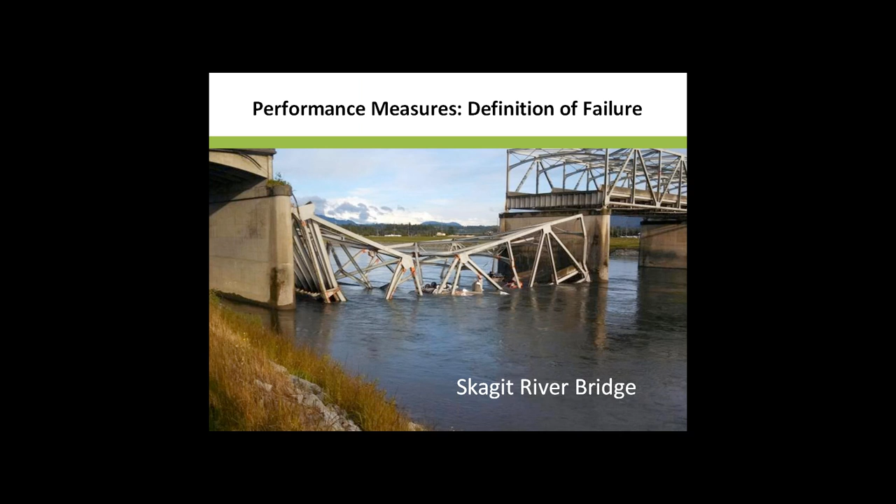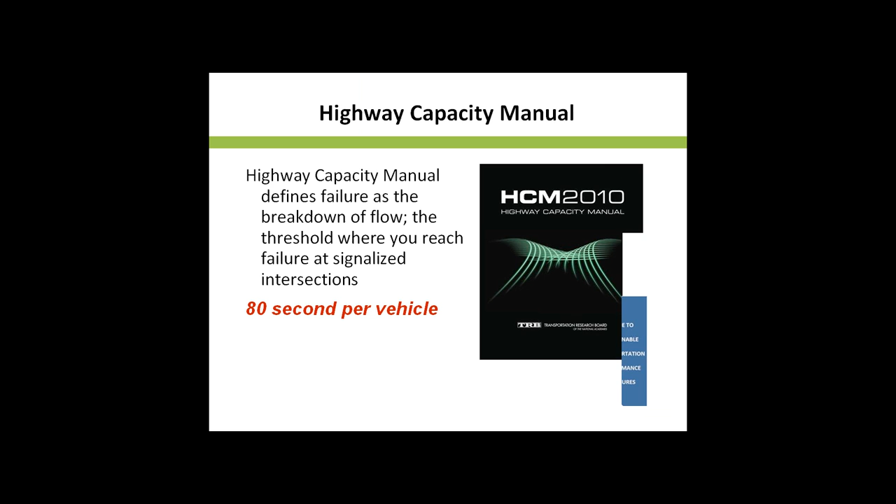But it does take time to create these sort of projects, as you learned earlier. Performance measures is the last piece I want to talk about.

As an engineer, I like to measure things and meet targets—really anything with numbers is what motivates us as engineers. So having performance measures that first define failure, and of course, the Skagit River Bridge just north of Seattle is a failure that engineers can relate to, something we work hard to avoid.

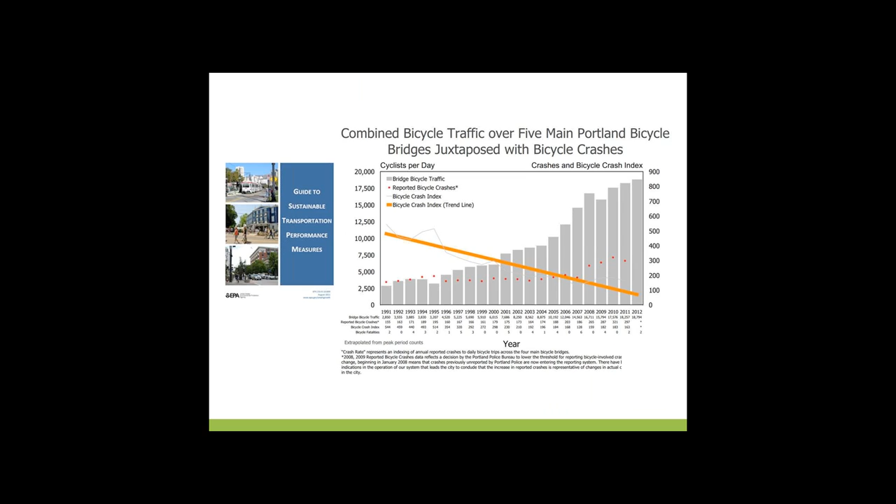But the failure threshold in the Highway Capacity Manual for signalized intersections is just 80 seconds per vehicle. The problem with that in the urban environment is twofold: one, it focuses on just vehicles—cars, not bikes. Second, it looks at the traffic signal, not a system of intersections. So in Portland we've been looking at different performance measures beyond delay per vehicle, thinking about crashes per mile of highway from the Highway Safety Manual.

That's a national document emerging as a potential tool, but at this point it's very highway focused. The Guide to Sustainable Transportation Performance Measures is another document, put together by the EPA, that you wouldn't necessarily think of as a transportation document, but it does have some performance measures we've used over time.

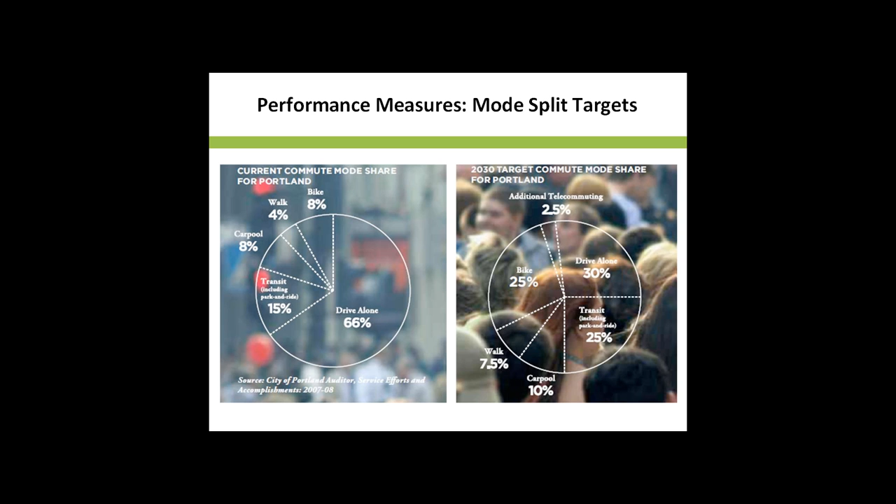This slide describes Portland's look at both bike traffic over time, over our bridges into the downtown area, but also reported bike crashes—what we call a crash index—that allows us to monitor how we're doing in terms of safety, not just about moving as many cars as possible.

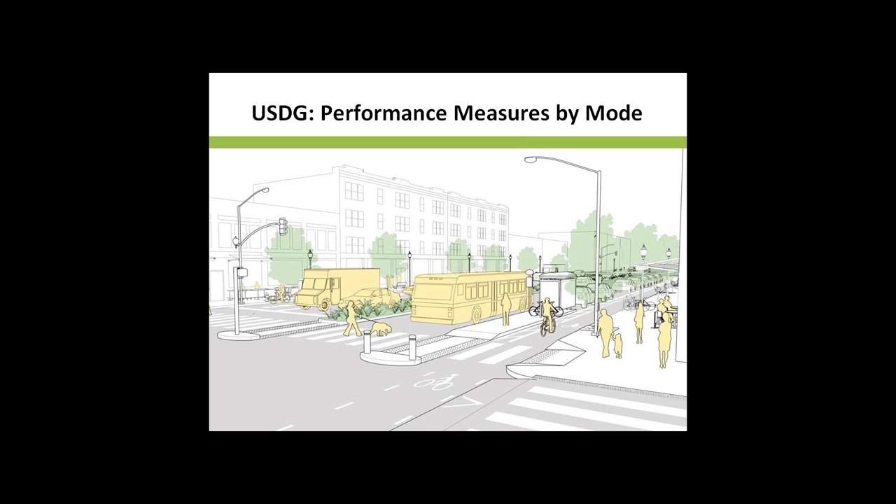I love numbers, so mode split targets is something else we took out of the Climate Action Plan. This slide shows the mode split for Portland as it is today, and what we're targeted for. Going from driving alone from 66% to 30%, and biking from 8% to 25%, really sets the stage for how we have to look at infrastructure to make that big objective happen.

It really presents a challenge for us as engineers to think differently about the space we have available to us within the right-of-way.

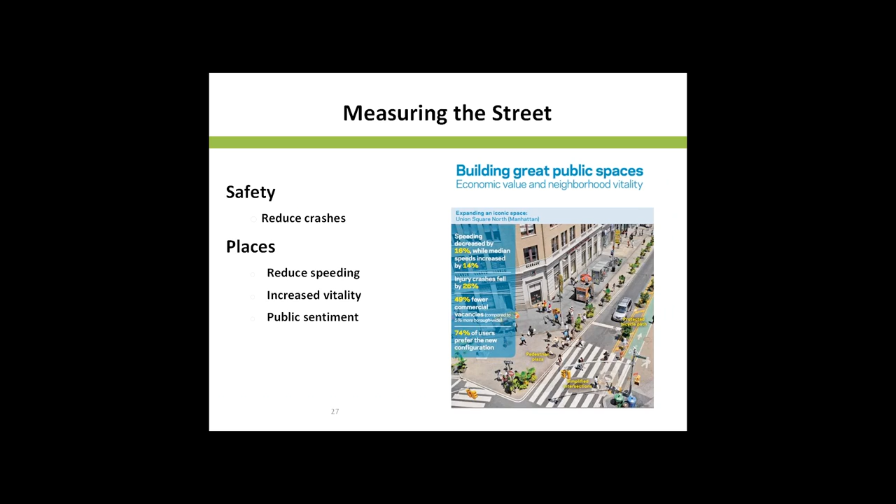So back to that level of service discussion, one thing I would change if I could with that measure is to just look at person delay—incorporating pedestrian delay, bike delay, and transit delay as part of it. Our vehicle standards today don't accept 80 seconds of delay per vehicle, but there's no procedure to consider greater than 80 seconds of delay for pedestrians.

So I would put that at the front, and that's what the Urban Street Design Guide does—it talks about performance measures by mode, and singles out thinking more broadly instead of just having vehicles at the forefront of what we use to make decisions in our public realm.

And I think David mentioned this before—it bears repeating that New York City DOT has done a fantastic job. That 'Measuring the Street' document is one we're looking at in Portland as a model for how to think more broadly about the transportation system. How do you measure the street? How do you frame the discussion about changing those spaces so they're meeting our needs and creating more dynamic urban spaces?

That's really the direction we see us going in the future—thinking more broadly about this. We don't want to leave traditional transportation analysis behind. We'd like to think about not just a point analysis, but network considerations—not just intersections, but systems. So we're trying to move away from that point-level focus and highlight the range of tools engineers need to make improvements in the system.

And that's part and parcel of how we think we'll move forward in Portland to create a more dynamic city, a better place to live, work, and play.

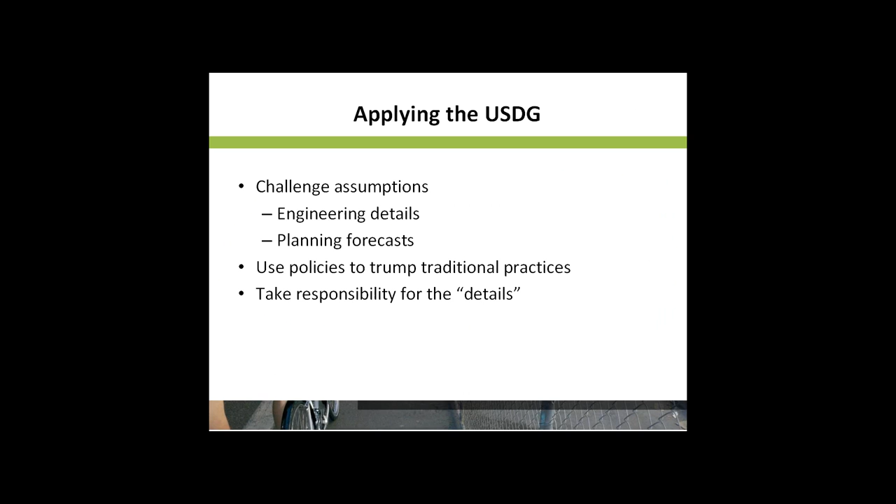So applying the Urban Street Design Guide, I want to leave you with a couple thoughts on what we'd love APBP professionals to take from this webinar: really challenge the assumptions, take a look at the engineering details and say, well, there is another way. It's not just one document out there that describes all we can do. The NACTO Urban Street Design Guide really does look at changing the paradigm, as David mentioned.

Also, beyond engineering, the planning forecast—what would 2030 look like? What does the future hold in terms of traffic growth? And trying to think about how we use policies to trump traditional practices, but overall take responsibility for the details.

Often I see that engineers are asked for the solutions, when in reality we don't have a monopoly on the solutions. So we really take you as the lead to move us forward in this discussion.